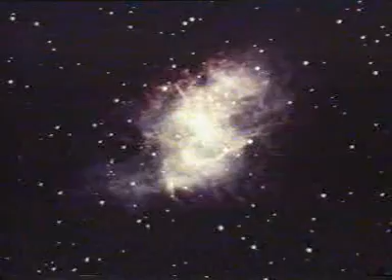Mechanics is the name of the game. We play with objects, subjecting them to motion under the application of forces. The rules of the game, known as laws of motion, have been derived from extensive studies on the behavior of bodies in nature, from falling apples to the motion of planets in the sky.

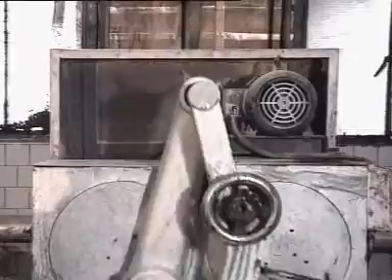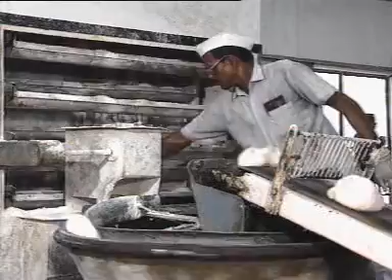The laws enable us to analyze the motion of bodies under the application of forces and to estimate the forces for the design of systems to create the desired effects. The action and effect aspects of mechanics apply to deformable bodies, flow of fluids, continuum, and are often extended to socio-economic systems. But we will confine ourselves to the mechanics of rigid bodies and point objects, that's particles.

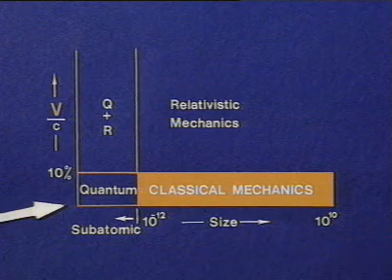It is not the same laws which apply to the entire expanse of size and velocities of bodies. We shall limit ourselves to classical mechanics. Material objects larger than subatomic particles with speed less than, say, 10% the speed of light obey the laws of classical mechanics. Of course, we shall take the state of rest as a special case of motion being zero.

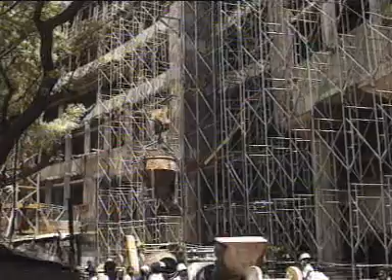Mechanics is at the core of all science and engineering because of its far-reaching applications in high-rise buildings, flyovers and bridges, in the design of electrical machines, in biomechanics and rehabilitation, and in vehicles for transportation on land and overhead, and perhaps in everything around us. All this makes mechanics a fascinating subject indeed. Let's have an insight into some of the basic concepts to clarify them.

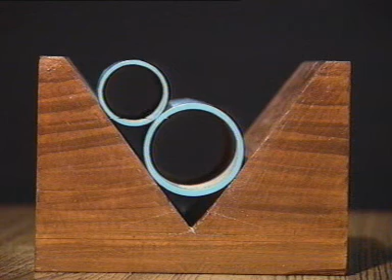In order to visualize the external forces acting on a body, it is necessary to start with a free body diagram. A free body diagram is that which isolates the body from its surrounding and shows all the external actions upon it. Let's look at two cylinders placed in a V groove. For the upper cylinder, the free body diagram consists of weight, normal reactions from the groove and from the lower cylinder.

For the free body of the lower cylinder, the weight, reactions from the groove and from the upper cylinder. And now, when the two are taken together, the action and reaction between the two do not appear. Only the weights and reactions do.

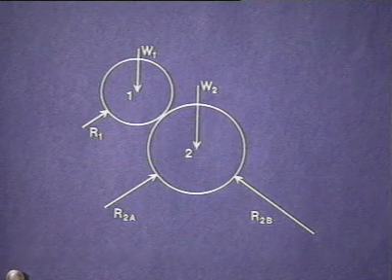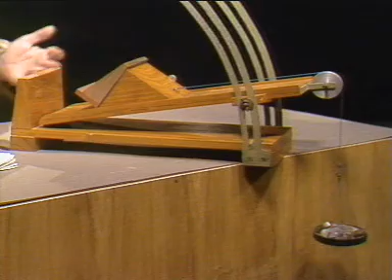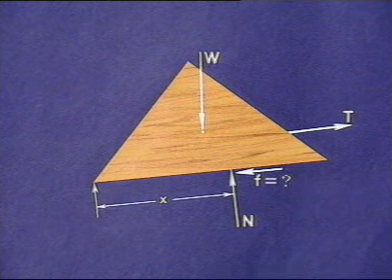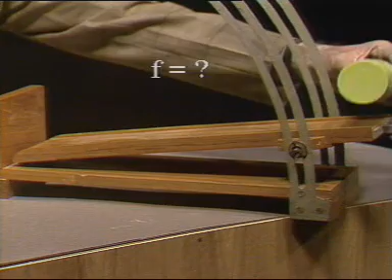Let's look at a common example: the free body diagram of a block sliding up an incline under the action of weights placed in the pan includes the frictional force F, normal reaction N, string tension T, and of course the weight W of the block itself. A question: what is the value of the frictional force F? Is it mu times N? What about the frictional force F for a cylinder rolling down the incline?

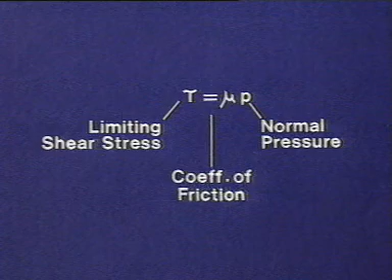It is best to begin with the postulate that the limiting shear stress tau is proportional to the normal pressure P between the two surfaces. Mu is the coefficient of static friction. If the shear stress has the same direction over the entire area of contact, then integration of this results in the well-known equation F max equals mu times N. This is true only for impending slip.

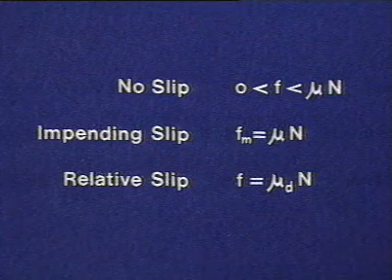Two bodies with surface contact may have no slip, impending slip, or slip relative to each other. For no slip, the frictional force may be anywhere between 0 and a value just short of mu times N. For relative slip, F assumes a value mu d times N, where mu d is the coefficient of dynamic friction, 10 to 20% less than the coefficient of static friction.

Now look at a case such as a thrust bearing. You can't apply F equals mu N, but you can determine the frictional moment by considering tau equals mu p at a radius r and then integrating to find out the total moment M.

A cylinder placed on an incline may go down in one of three ways: without slip, with impending slip, or it may slip while rolling. For rolling without slip, the value of the frictional force is again between 0 and the maximum value F max, whereas for impending slip, F max equals mu N, and for slip, F is equal to mu d times N.

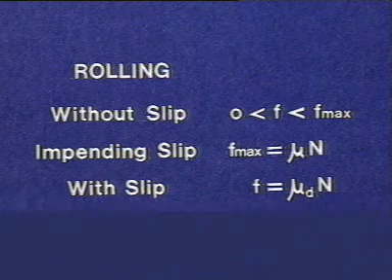The direction of the frictional force F is not obvious. Does it always oppose motion? Would you like to draw the free body diagram of a vehicle for a hind wheel drive and for a four-wheel drive? Let's try.

In a normal two-wheel drive, the front wheels merely roll. The power of the engine is used to turn the hind wheels, which push the road backwards. The road merely obliges and pushes the car forward. The frictional force on the wheels is in the forward direction. This is only a fraction P times the maximum possible friction, that is mu times mg.

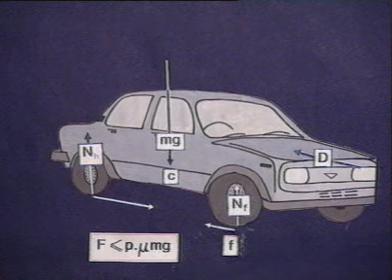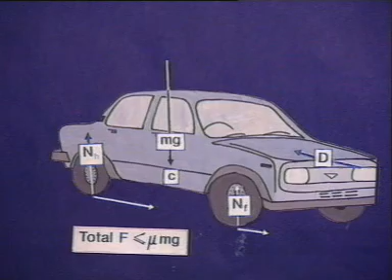In a four-wheel drive, all the four wheels are powered and the vehicle can get the maximum possible forward thrust, mu times the weight of the vehicle. Once we have a clear idea of the forces and moments acting on a body, the laws of motion are used to determine its motion.

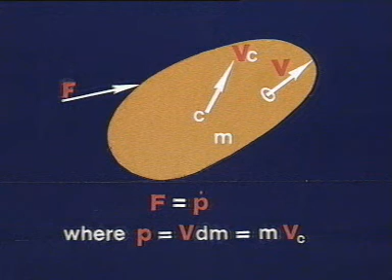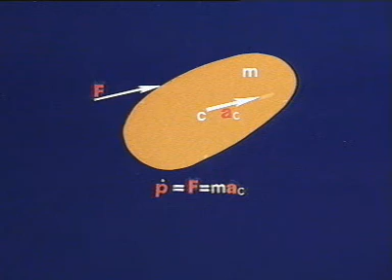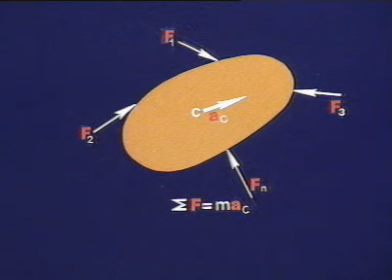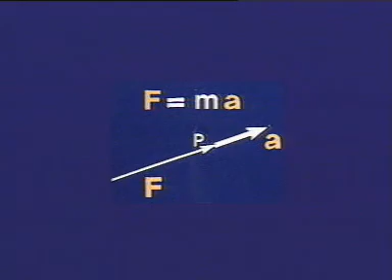The force referred to is the vector sum of all the external forces, and the acceleration is only that of its center of mass c, regardless of whether the force sigma F acts through c or not. For a point mass, that is a particle, the resultant force and the acceleration are collinear. Newton's laws do not cover the rotational motion of a body.

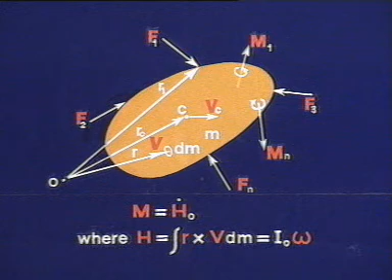It was Euler who postulated an additional law for rotation by considering the mass distribution of the body, that the rate of change of moment of momentum of a body equals the moment impressed upon it about a point fixed in the frame of reference. The simple form Mz equals Izz times alpha is valid only for a rigid body undergoing fixed axis rotation.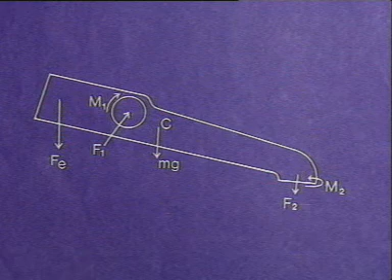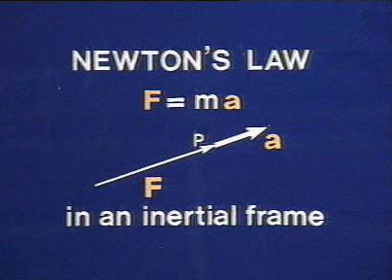Newton's law is applicable only for an inertial frame of reference. We cannot choose the origin anywhere on a moving body. A frame of reference is said to be inertial if it is either at rest or in motion at a constant velocity. A frame which either rotates or accelerates is a non-inertial frame.

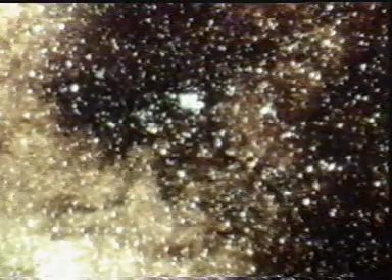A frame fixed at the center of the solar system appears to be the best inertial frame for us, assuming negligible force acting on it from outside. A frame at the center of the sun is the next best. A frame at the center of the earth is the best approximation for an inertial frame for long-range missiles and earth satellites.

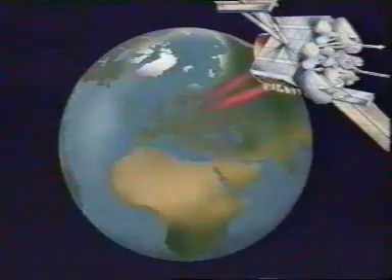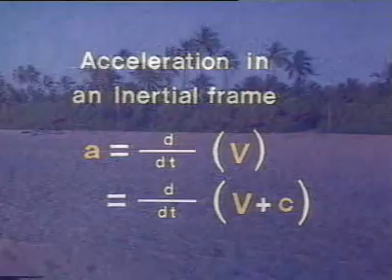However, a frame located at the surface of the earth is a good enough frame even though it rotates a complete revolution in 24 hours. Then any frame fixed with respect to the earth or moving at a constant velocity is good enough, as the acceleration would be the same referred to any inertial frame, as the addition of a constant velocity makes no difference to it.

Let's also look at the concept of equilibrium. By definition, it requires that every material point of a body should be at rest in an inertial frame. From the laws of motion, it follows that sigma F equals 0 and sigma M equals 0 for the whole body. But then, these are only necessary conditions of equilibrium and certainly not the sufficient conditions to ensure equilibrium, because even when sigma F equals 0 and sigma M equals 0, a body such as a spinning top is not in equilibrium. Different material points have different velocities and accelerations.

Now let's look at a vehicle of mass m negotiating a turn of radius r at a velocity v. Is it going to skid or is it going to overturn under the influence of centrifugal force? Let's pause to think what centrifugal force is. Is it a real force for an inertial observer?

First of all, let's understand that the vehicle turns into a curve by virtue of the radially inward force called centripetal force. This is provided by the friction between the wheels and the ground. Beyond a critical speed for a given radius r and frictional coefficient mu, the vehicle may skid radially outwards while following a tangential path.

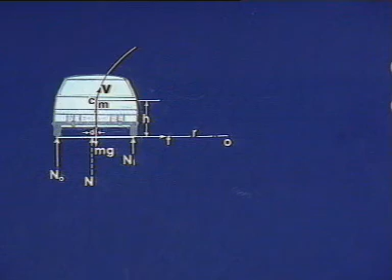During turning, the reaction at the outer wheels is more than that at the inner wheels. At a certain speed, the overturning moment may exceed the stabilizing moment and it overturns radially outwards. No wonder someone said, be soft on the curves.

Are you surprised that the radially outward overturning of a car has been explained without invoking centrifugal force? Well, there is no such thing as a centrifugal force for an inertial observer. Let's look at the motion of a particle from an inertial reference and from a non-inertial reference. The inertial observer notices an acceleration AC. The non-inertial frame has a linear velocity v0, acceleration a0, rotational velocity omega, acceleration alpha. The non-inertial observer notices an acceleration am of the same particle. What then should he do to apply the Newton's law?

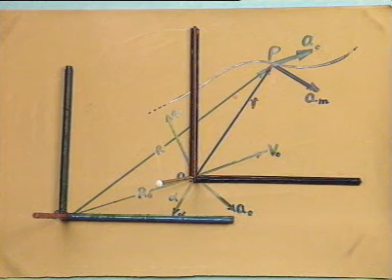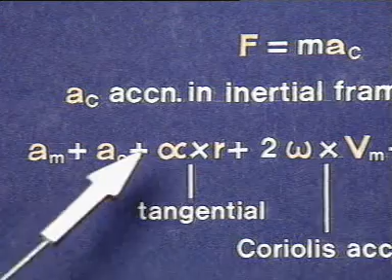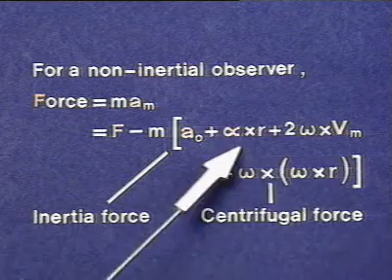The inertial observer may apply the Newton's law F equals m times AC, whereas the inertial acceleration comprises acceleration of the moving frame, a tangential component, a radial component, and a Coriolis component, with respect to the moving frame. The non-inertial observer may apply the Newton's law by clubbing the minus m times acceleration just named with the external force F. These additional force terms are called inertia forces.

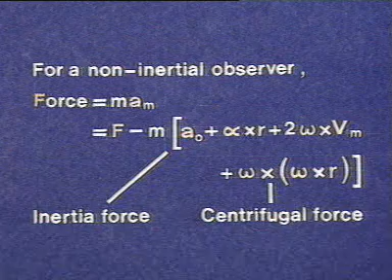In particular, minus m times omega cross omega cross r, which reduces to mv square upon r radially outwards, is called the centrifugal force. That explains why a non-inertial observer sitting in a car notices loose things going outwards as he himself feels being pushed outwards. The inertial observer, on the other hand, can neither see nor feel the inertia forces.

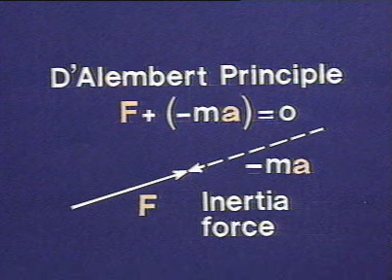The same thing is explained by invoking the D'Alembert's principle, where the Newton's law is written in a frame translating with respect to an inertial frame at the center of mass of the system. For a particle traveling at a constant speed v along a circle of radius r, the inertia force equals mv square upon r in a radially outward direction. That is the centrifugal force for a rotating observer. Of course, there are many alternative formulations of the Newton's and Euler's laws and special cases called principles.

The impulse momentum principle states that the impulse of a force on a system equals the change in its momentum. And in the absence of external forces on the system, the total final momentum equals the total initial momentum. The work energy principle states that the net work done by the external forces on a rigid body equals the change in its kinetic energy, which reduces to the conservation of mechanical energy principle in a conservative force field. And then there is the conservation of moment of momentum principle in the absence of any external moment acting on a body or a system.

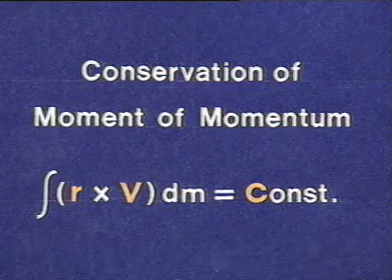Now, why these principles and which one do we apply under what conditions? Is there a preference for one over the others in some situations? If so, which one would you apply for the impact of two bodies, and which one to explain the gyroscopic principle? The principles are the first integrals in time and space for the same laws. That's why they make things easier.

When the force is an explicit function of time and we wish to determine the velocity, we prefer to start with the impulse momentum principle. In the absence of an external force on a system, we employ the conservation of momentum principle. If the force is an explicit function of displacement and the objective is to determine the speed as a function of position, we employ the work energy principle. If, however, the force varies with velocity, we invoke the basic laws.

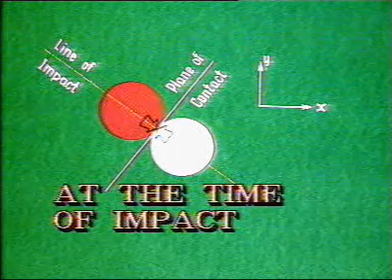In an impact, there is no external force or moment on the system. It is best to apply the conservation of momentum principle. If, however, we wish to find the average force during impact, we estimate the time and then apply the impulse momentum principle on either body. The gyro couple is perhaps better conceived by applying the Euler's equation itself.

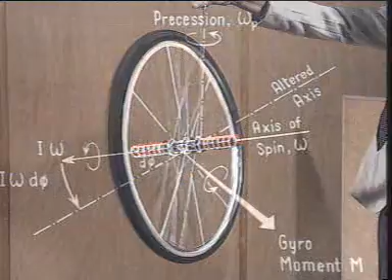I am sure you can conceive many more problems and try solving them yourself by applying the laws and principles of mechanics. This is what mechanics is all about, helping us solve problems and design newer systems. You can sum up the thoughts that triggered your mind. Perhaps you can review the trigger shots again and conclude it for yourself.